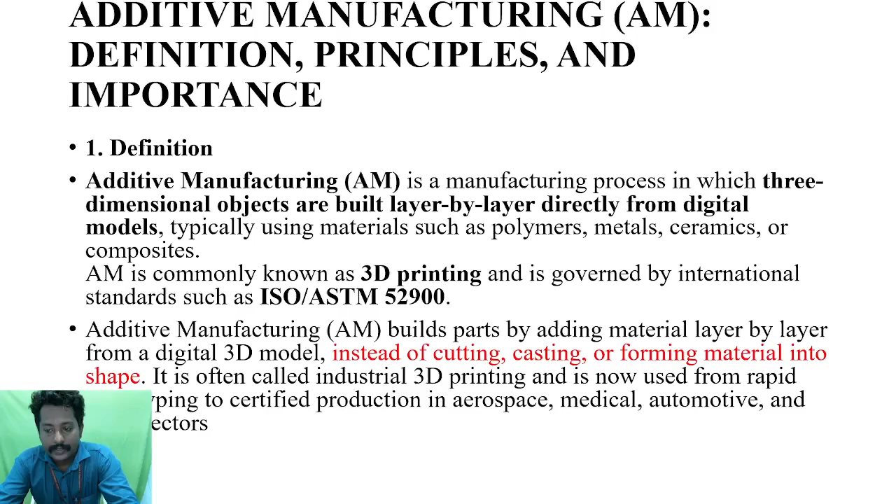Some people are asking, additive manufacturing - what is that? Very simply, we can call it 3D printing. So everyone knows 3D printing, so now it's a very easy subject. It's a three-dimensional object built by layer, directly from a digital model.

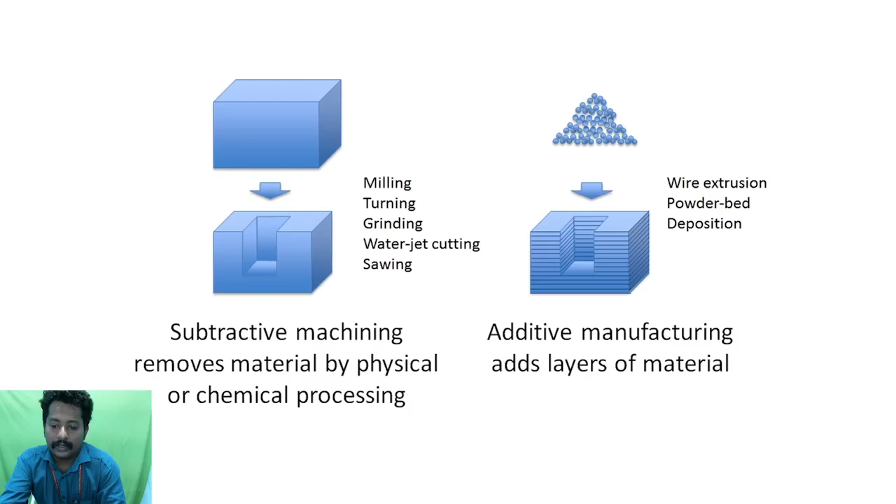In milling, drilling, grinding, or similar processes - this is subtractive machining, removal of material by physical or chemical process, like milling, grinding, or water jet cutting. This is the traditional method of making an object. Now additive manufacturing, or 3D printing, means adding material layer by layer.

Now you can see why additive manufacturing is better. There are two types of material, A and B. A is like milling or drilling - machining will be done and material will be removed - and the waste of material you can see is very large.

Here, part B is for additive manufacturing or 3D printing. We just go to additive, layer by layer making, and the material is done - you can see the waste is very less. So compared to traditional manufacturing, when it comes to 3D printing or additive manufacturing, the waste is very less, but the time taken for the process will be huge.

We can reduce the time by changing several parameters, and there is research going on in this subject. In our college also, several people are doing deep research on additive manufacturing, 3D printing, and how to improve its life. We don't have to discuss that in detail - we just understand, okay, this is additive manufacturing. We just want to look into how to improve the production, what areas can be covered, how to control and improve the product and the process, and what rules we should implement. These are the things we are focusing on in this subject.

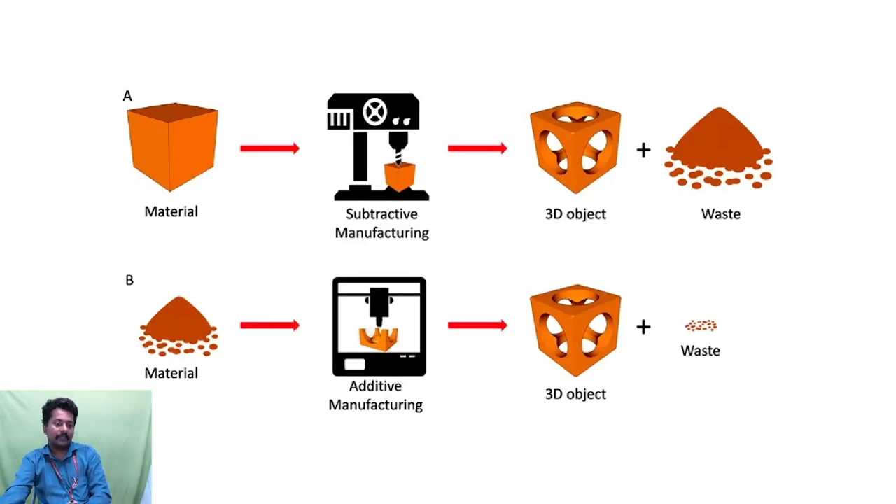If we have to make something bigger, we can make a small model and check it with experimental aerodynamics, checking dimensions and wind nature. If we have to build something like a building for civil or aeronautical purposes, we build it using a 3D printer, and use experimental aerodynamics to check airflow velocity, material characteristics, and everything - we can touch and make it.

Then we can make the original material. So this can be used for prototyping, and we can change several prototypes easily and check each one, then build the final version later. So additive manufacturing has several advantages, but this subject is not about additive manufacturing itself - this subject is for improving the entire process of additive manufacturing.

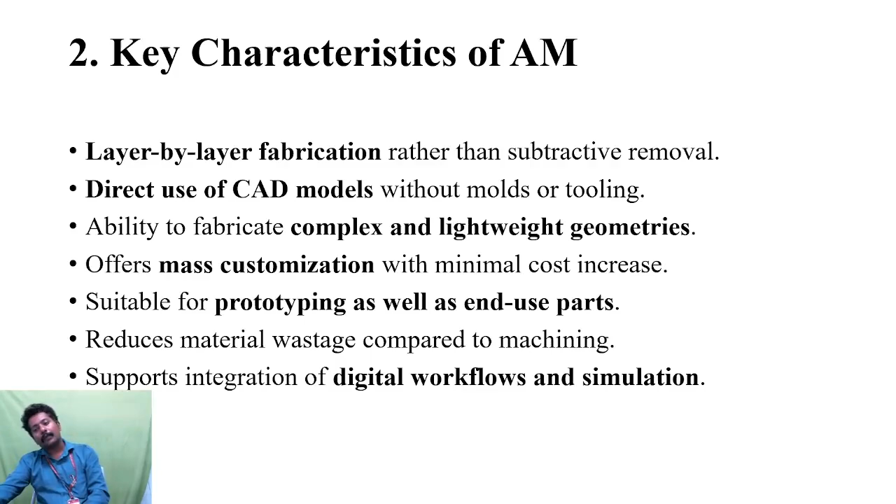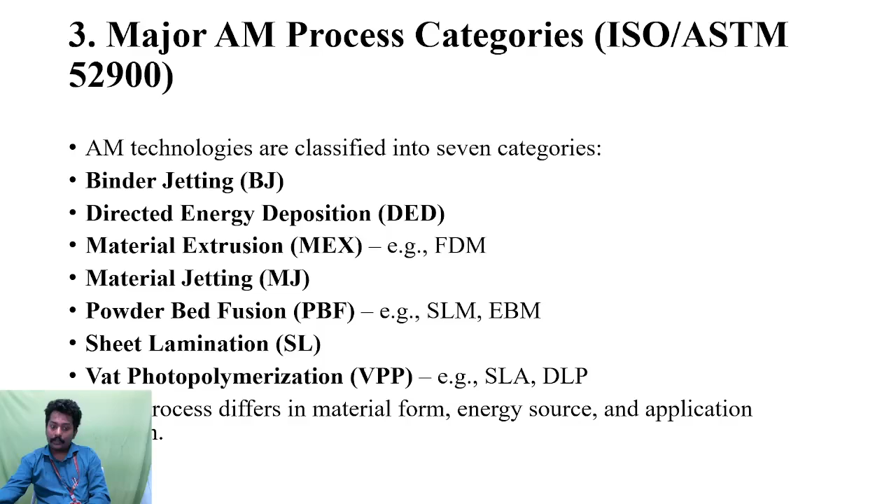Okay, everyone knows ISO, and now just see that this is a process. We just build a CAD software, use this CAD software to build something, and slice these details, how this software will run, and the additive process and things like that. These are the four stages of making an object.

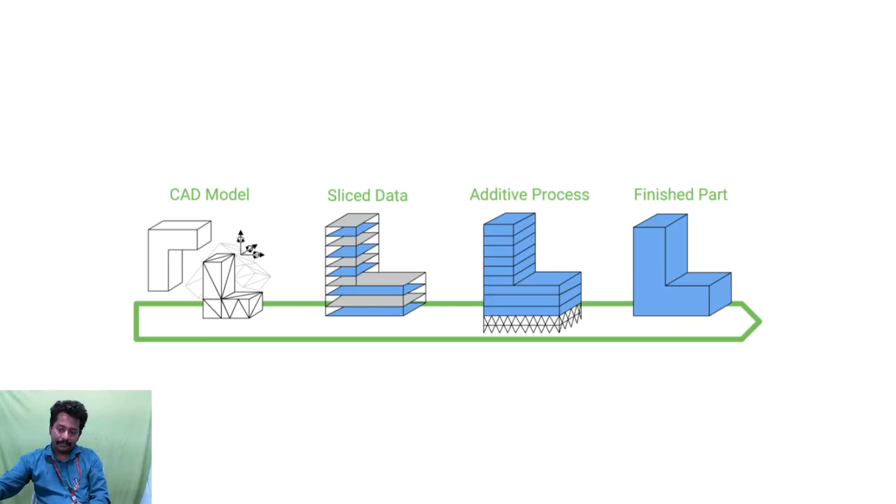First we have to make a CAD model. Inside this CAD model software, the 3D printer software will slice the data and divide it layer by layer. Then we run the additive process, take the product and give it finishing, and we get a better product.

Importance and advantages: additive manufacturing is important because it changes both design freedom and supply chain strategy, allowing lightweight proposals. So many things can be done. We can make customization, changes, mass production. We can achieve several advantages.

At the system level, additive manufacturing can reduce material waste, shorten lead times, and support on-demand parts production. Like if you have a bike or something and lose a part, the manufacturer may not be able to manufacture it for you. Like Royal Enfield or any manufacturer, they don't have spare parts for that. So you can take the dimensions and give them to 3D printing, which will run the project so you can use it. These kinds of advantages exist.

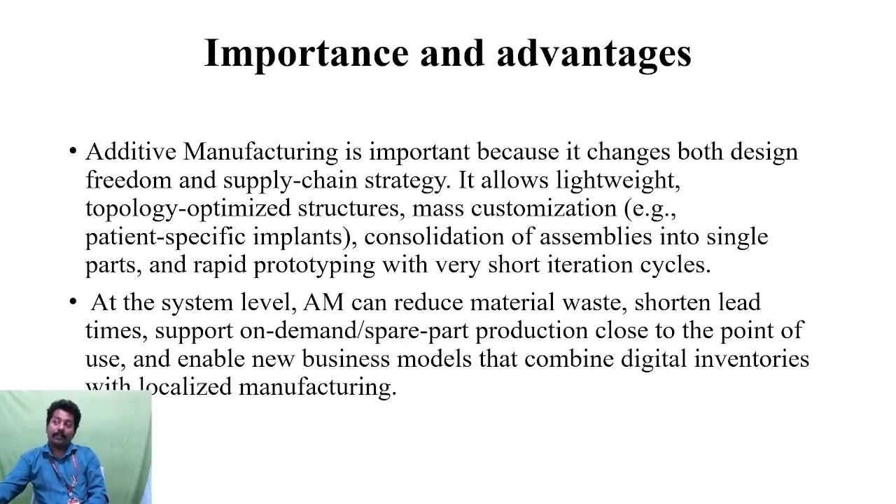There's some news where people are using 3D printers to make guns, which is illegal. Don't do that. Okay, next, the models of additive manufacturing are material jetting, powder bed fusion,

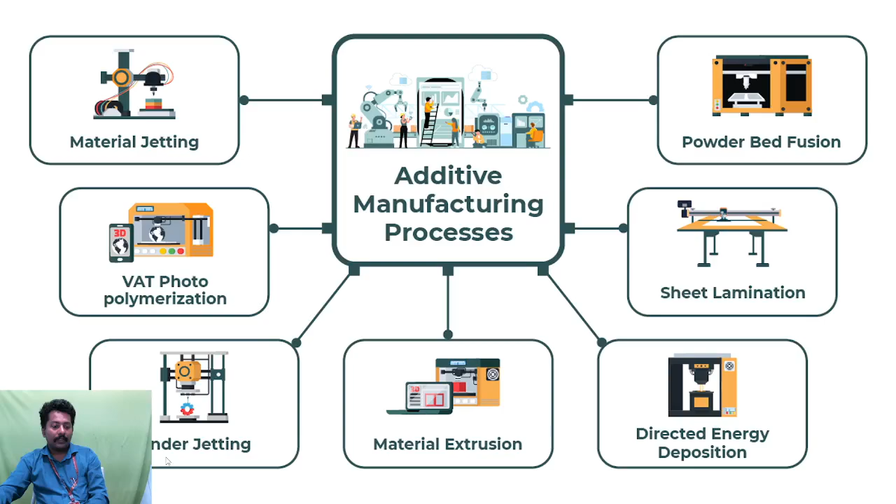Applications of additive manufacturing include aerospace lightweight structures, automotive rapid prototyping, biomedical, industrial manufacturing, and custom products like jewelry and footwear. Nowadays Adidas and other clothing and shoe companies make their shoes using 3D printing, and most complex dimension jewelry is also done using 3D printing.

People are using 3D printing for fixtures and jigs and everything. I also want to talk about aerospace - it means we make a prototype of tools or material, scan it, and give it to the 3D printer, which will do the work.

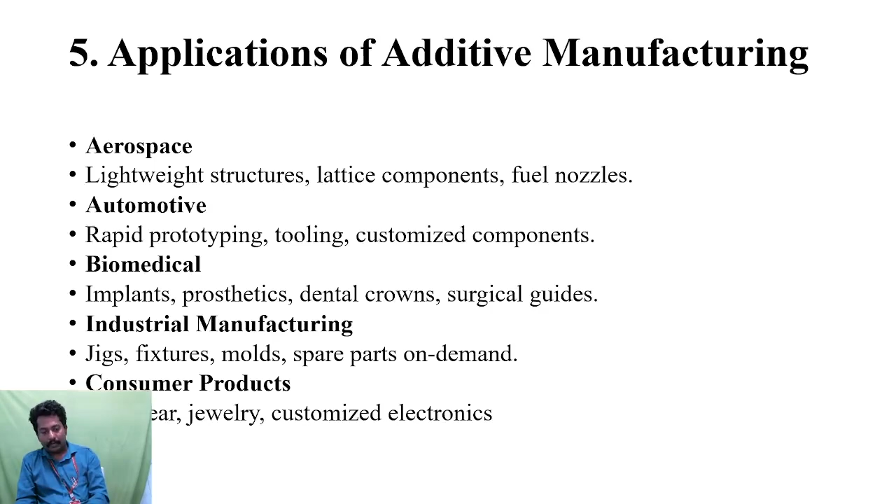This is one type of material extrusion that we use. There is a foil in which the material will be, and it is deposited layer by layer. This can be plunger based, filament based, or screw based. You can see it's like injection molding - material is forced out.

This nozzle injects the material through this pipeline, and slowly the piston goes down and material comes out. It's very simple, like a syringe or piston. By loading the liquid tank, the piston goes down, and due to the pressure, material comes out and creates the layer construction.

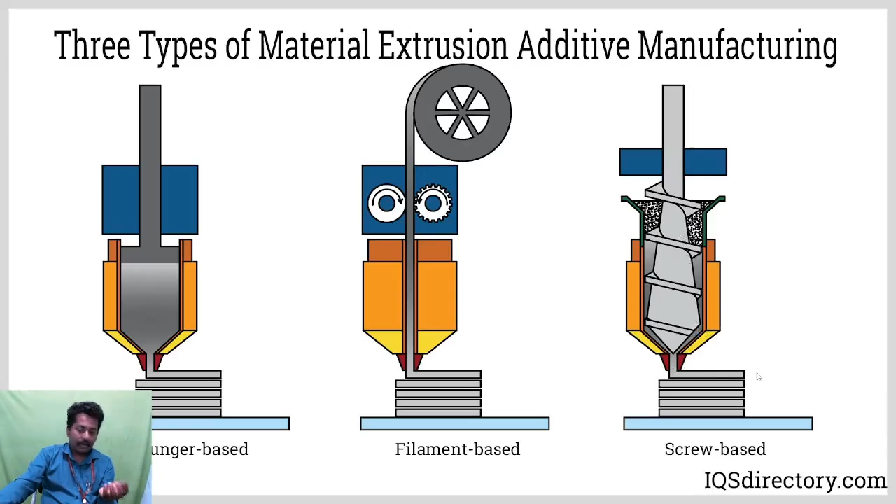And filament based - this is another method, similar to the first method. We use two rods, and this is the filament. This filament goes through and is heated at a certain time and angle. This is the screw method - we crush the material and combine it together, and the material is formed. So this is the basic process.

Okay, now we are going into the main topic: quality control management and its role in enhancing performance reliability in additive manufacturing. Quality management in additive manufacturing spans a structured framework for planning, controlling, monitoring, and improving the additive manufacturing process, ensuring that 3D printed components meet the required functional and mechanical specifications.

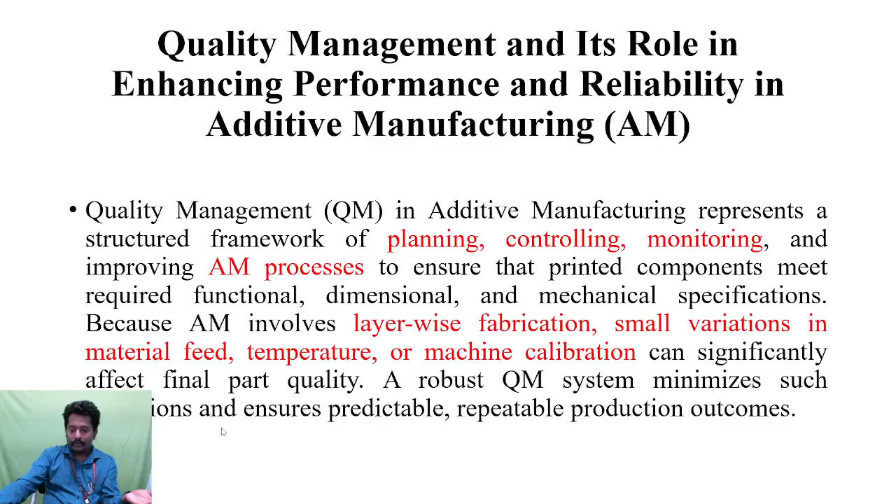Because additive manufacturing involves layer by layer fabrication, factors like variations in material, temperature, or machine calibration significantly affect the final part. A robust quality management system minimizes such deviations and reduces damage to the material, and the reliability of the product can be increased.

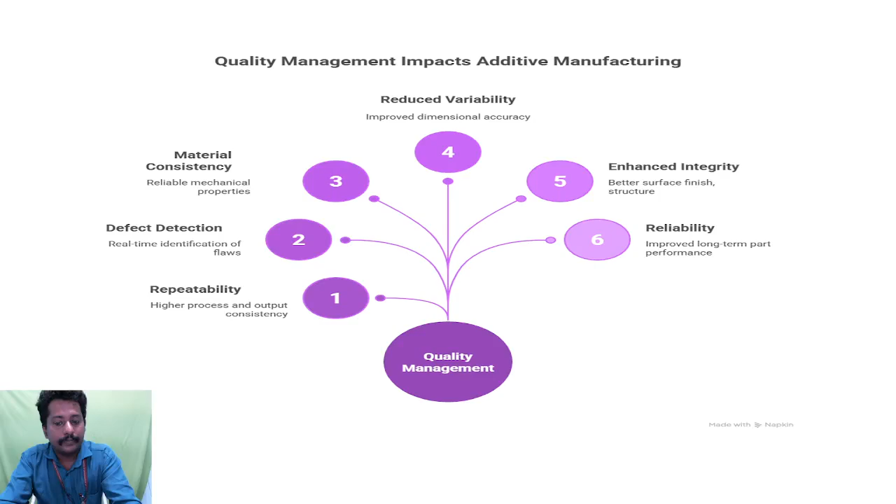Some people are making hundreds of material per day. They will make a better product with 30 or 60 something. But if you have a quality management system, every day if we need 100 products, they will give you 99 products that will be better. They have less defects compared to companies that do not have a quality management system.

Strengthening process of reliability through standardization and control. Additive manufacturing such as SLM, EBM, these have a variable nature. This will improve our process, the entire process.

Process controlling SOPs define the machine setup. ISO standards define how the process will be done, for global uniformity. Like the machine will be produced in Germany or somewhere, and it will come to India. We have to make sure okay, this is all common in there, and the work time period, rules, safety procedure, everything will be under the ISO regulation.

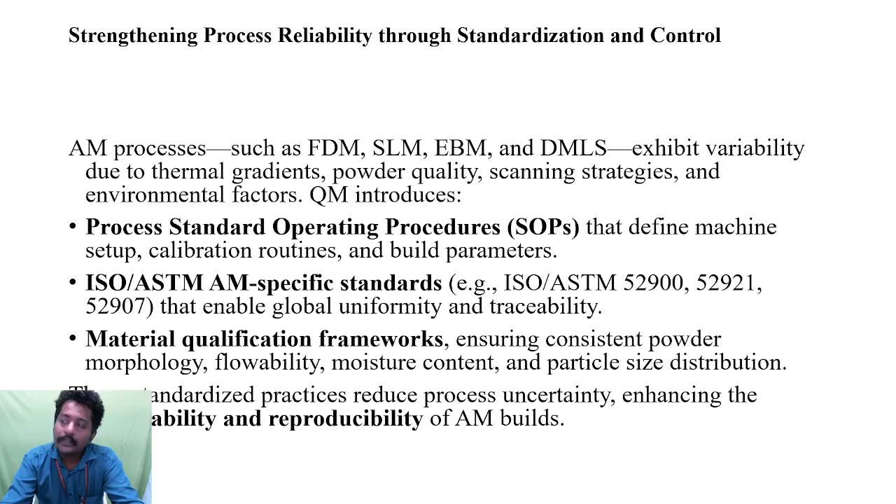And material qualification - by buying something from one company, we have to know this company has this kind of qualification, that means this material has a good framework, material can be trusted, we can use it. Establish ISO.

Now you can see the modern quality framework. This is something to inspect the entire system. By doing the entire process, we can check this process is running right.

Like ATM. We go to ATM, put some pin code, get money. During that time, if the ATM sensor detects something, okay this person took the money out, okay it's done. Something like that - this is a feedback system.

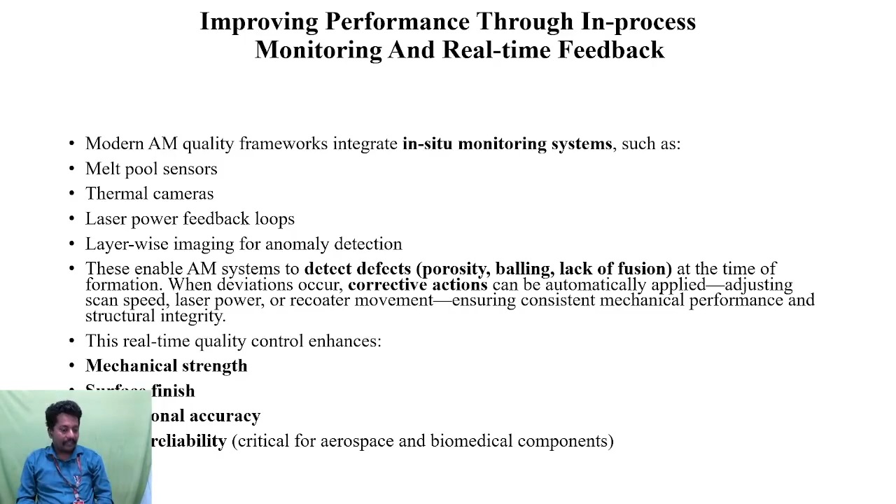And this will give you mechanical strength, surface finishing, dimension accuracy, reliability.

If some error happens, we can just find it from this data. Okay, machine having some data, machine needs a service or something, we can determine from this data. Or if you change the material, like raw material is changed, the machine is taking too much time. So based on the data, we can make a comparison and understand how to improve ourselves, to improve the quality. So the quality management prioritizes digital tools.

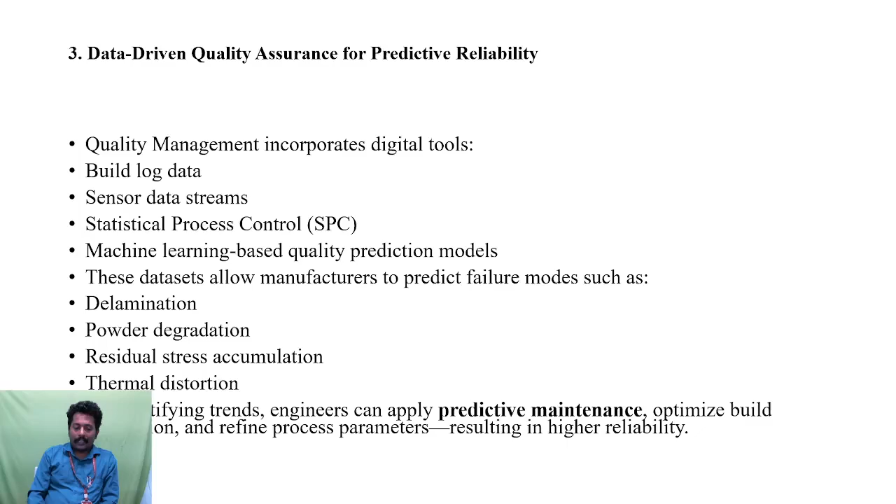We have to build log data, we have to make sensor data. Like I told you, we use several sensors - the feedback from sensors will be recorded and collected as this data type. And machine learning software can be used to check this material and its natures and everything, and powder degradation and thermal distortion, and this kind of negativity.